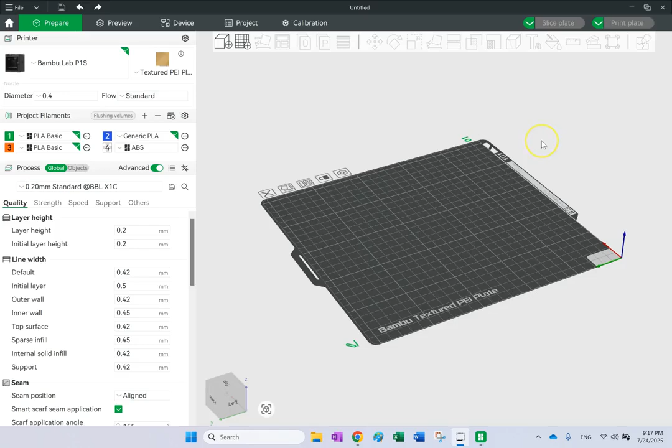Hello everyone. In this video, I'm going to show you some advanced features that are available in Bambu Studio, and probably it's also available in some other printers too. So I'm not claiming that this only belongs to Bambu Studio, but since this is the new printer that I'm working with, while still working with other printers we have, I found it has some interesting features in the slicer software, so I wanted to show them to you.

So the first one that you know is some of the Bambu printers, they have this multi-material head called the AMS. And if your printer has those, then you can basically synchronize here all of the material that you have and all of the colors with that AMS, and then you can print multicolor, right? So that's probably the most interesting thing I would say, but there are lots of more interesting things.

So here you can basically go ahead and remove all of the spools, or you can add them, right? Add as many as you want, and then say what material it is and click here to edit everything about it. Or you can click here on this button and say synchronize it with the AMS.

And as soon as you do that here, the AMS I have has 4 filaments in it, and one of them is orange, one of them is blue, one of them is green, and one of them is a support material. So you see, automatically it synchronizes with that, okay? Because I set it on the hardware, and now here all it needs is one connection, especially because now I'm logged into my account and I have connection remotely to my printer.

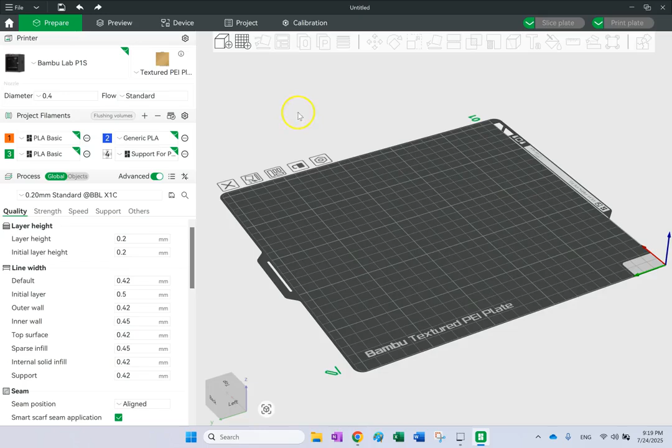So now let me show you the multicolor. So here, if I bring anything, right? So let's say, for instance, I bring this balloon dog, and let's scale it up a little bit. So maybe 10 times bigger. And then maybe just rotate it a little bit. So here, I want to print this part, right?

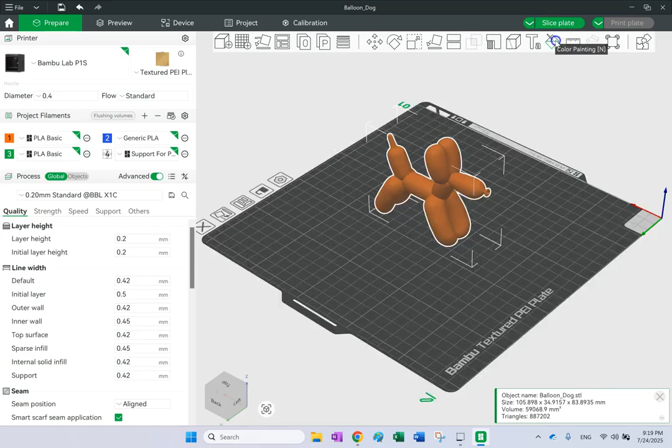So I can pick this and then go here to this option, color painting. And then it gives me different options for painting that. Okay, so I can do gap fill, height range, triangle, sphere, and circle. So these are for like grabbing a marker or some painter and then paint over it, right? So let's say I want some parts to be blue, right? And then I can go ahead and here simply paint all over the part.

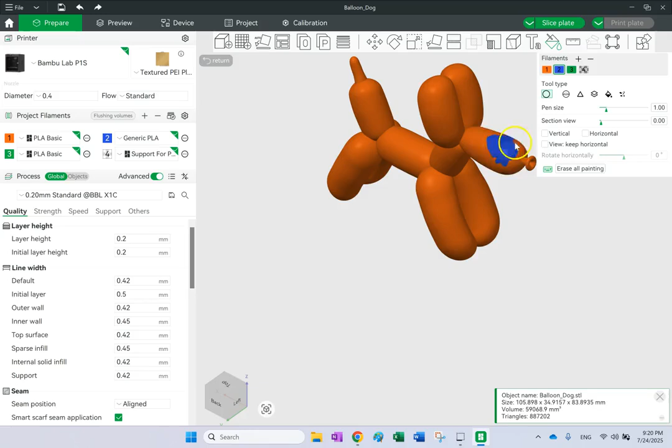Now the problem is you can never get to observe all of the boundaries. So let's say I just want this nose and this head part to be blue, but when I get close to the ears, right, I cannot exactly go perfect, and there is a chance of my hand slipping a little bit, and then I go over the next part. So instead of that, the better way to do it is to use this fill command. This fill command basically goes over one closed area.

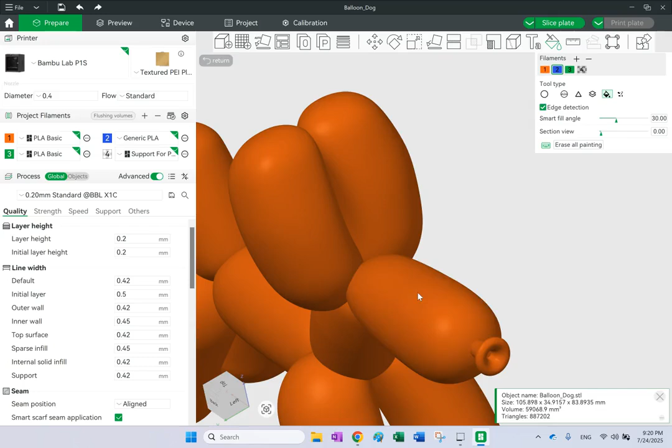So look here, boom, right? Very beautiful. I want this, here we go. I want that inner part, here we go. You see? So this is really great. And I can do similar thing for, let's say, these two, and maybe this one and this one, and the rest of it, maybe I want it orange, okay? So this is a really powerful tool.

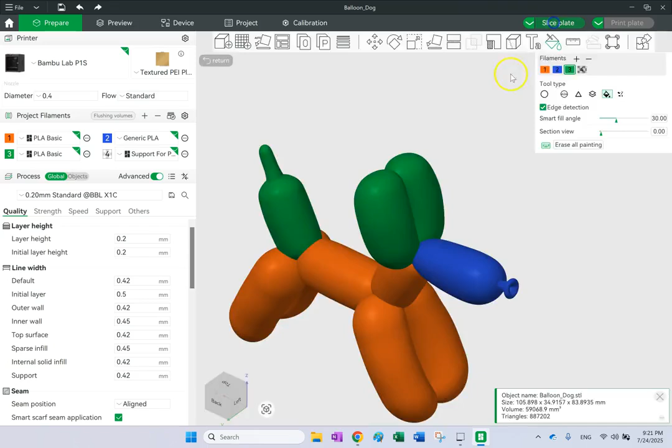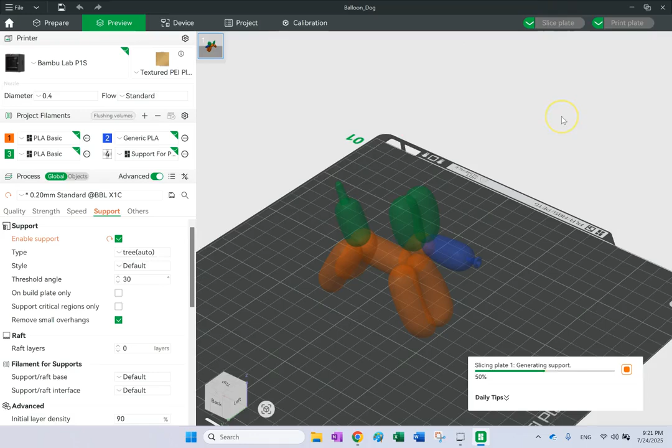And let me tell you that if you do this and you slice it, you're gonna see something that you don't see when it's unicolor. So let me show you here. Now, of course, here I did not put support. That's why it gave me that warning. So it's always good to go under support, and by default, it's not active in Bambu. So you say, hey, enable support for me, okay? So make sure it doesn't have any dangling parts, because those are too long for a bridge.

There we go. And typically the default support in it is the tree shape, which we can change, and I'll show you. But the thing that you see is this guy here. This is basically the purging tower. And you need that when you want to constantly change color, because here, look, you go from one color to the next to the next. So you clearly need to have a purging tower so that it can purge the remaining of the previous color and it can switch to the new color, okay?

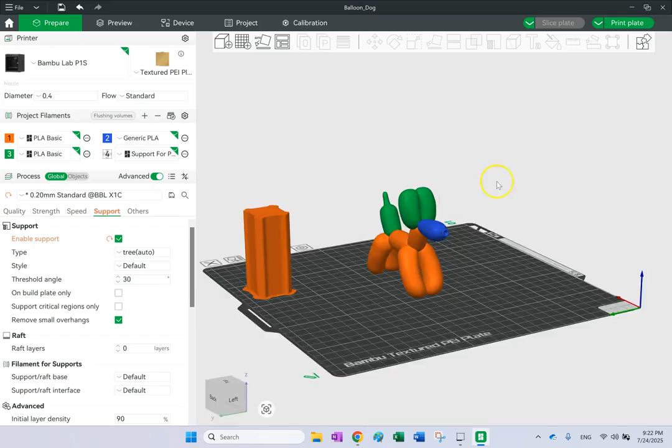But if I go back here to this guy, and let's see if I can clean it up. There we go. And now let me slice it again.

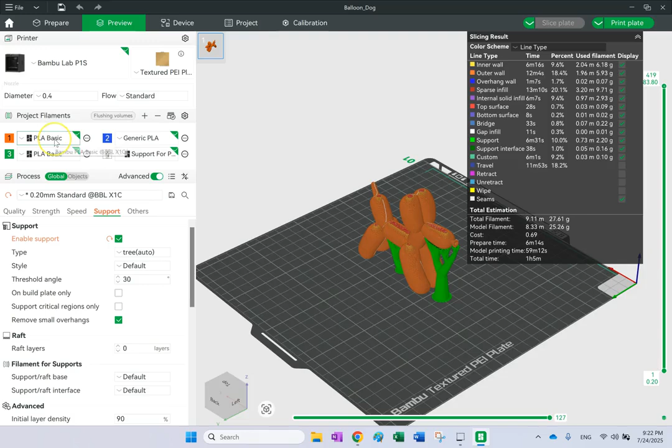There we go. You see? No purging tower, because it's all single color orange in this case, I assume. That is my first spool. And so that really helps save a lot of material. So unless you really want to do it multicolor, then don't go for it, because you are wasting a lot of material in that purge tower, right? So this is about printing it multicolor.

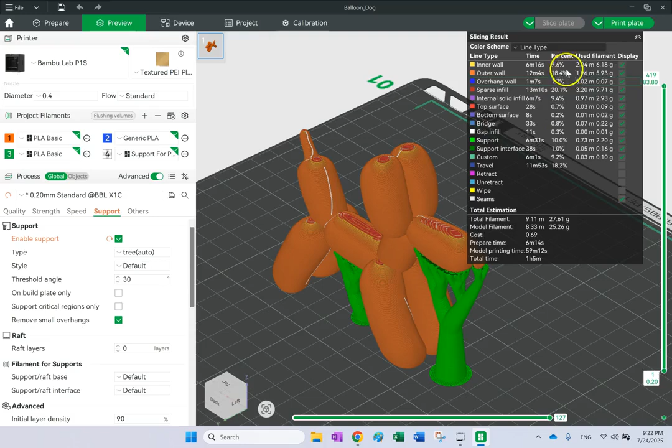Now, let me show you one other thing before we move on any further. So if I go to device here, right? And then if I click on this button here, look, here it has some AMS settings. So that is another thing that is very important. These two by default are not active, but I recommend you do it. So one of them makes sure that if you run out of one filament, it automatically starts using the other filament and doesn't stop.

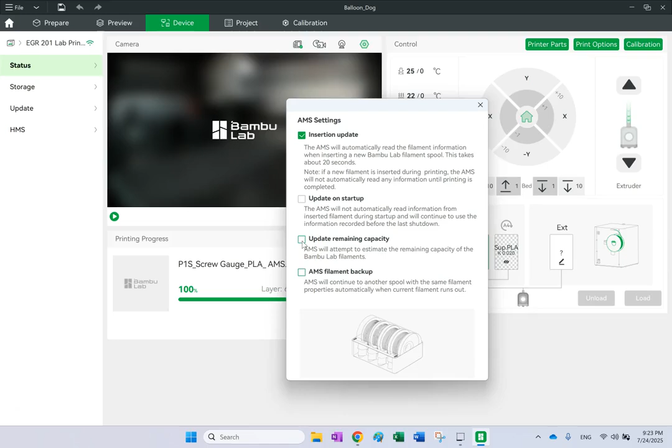Now, this is if you don't care about the color, or if they're all the same color, right? So you can have 4 spools of the same color. So if you have a big print and mid print you lose all of the filament or half of it or something, it can continue. So this is a good thing, or it could be a bad thing depending on, again, whether you care about color or not. The other one is really good. It estimates how much of the material is left, and it can give you a warning. Okay, so I typically turn those two on unless, again, I really want to know about color.

And of course, you always have remote access to your printer. So you see here, right now, it is showing me basically the system, and you can clearly see that the print is done and it was successful and everything. And again, it is showing you here the remaining material that I have. Okay, and you know, a Bambu printer also has room for one external spool. You can also do that one as well, and you can do all sorts of controls here.

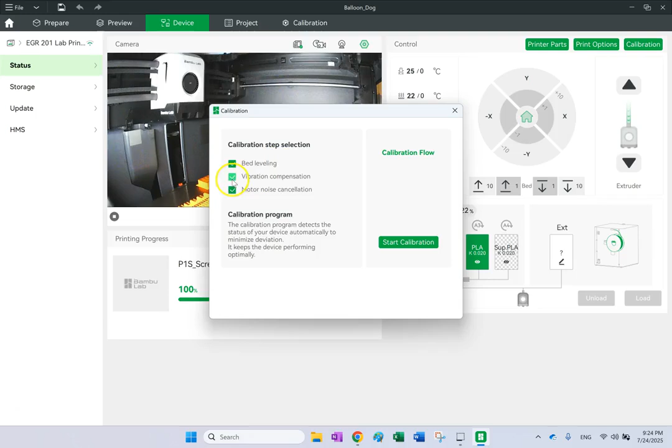Another interesting thing it has is under calibration. Not only does it do the automatic bed leveling, it can also do some vibration compensation, which is really good, okay? So if the foundation is not very hard, or if the speed, which is here, if you put it on high speed, then you can have some vibration, so it tries to compensate as much as possible.

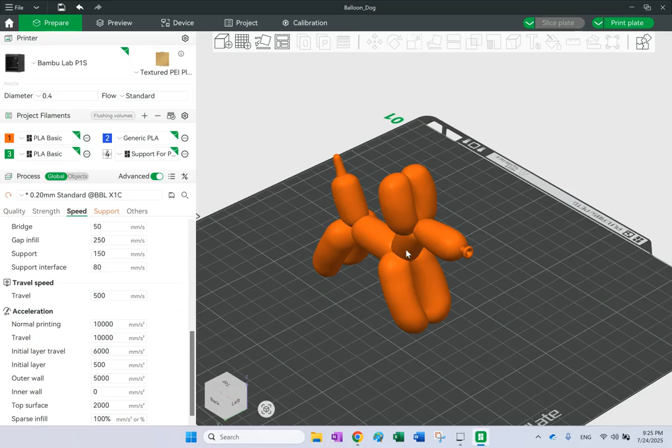And you know, one of the big advantages of Bambu is the high speed of the printing, okay? So it has 500 mm per second, but it can go higher than that, a lot higher than that. So Bambu is one of the first printers that could really print very fast. So these are two of the items. Now let's go to the next one.

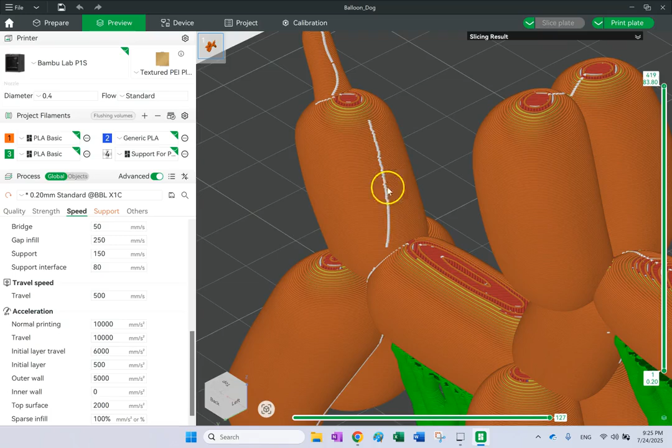So the next one is about seam. So let's talk about seam. You might have seen it here and there, but I just want to explain the seam for you. So what is seam? So look here. You can see this kind of white track here. What is this? These are where each layer starts or ends, and the next layer starts. This is where your extruder stops and then goes to the next layer, goes around, comes back, goes around, comes back.

And typically this seam in physical prints is going to cause some physical gap or basically a small extrusion out of the part. If it's extrusion out of the part, you can probably just cut it out with a knife or a sharp tool. But if it's a gap in the part, that is not going to be pleasant, right?

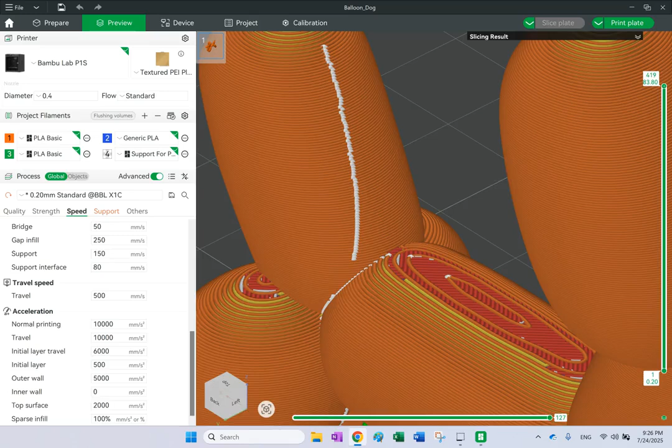So let me show you a seam in a 3D print, so you physically see that. I don't want to grab one here right now, but let me just show you here. So this is one, right? You can see here, that is the line, okay? And this is where each layer finished and the next layer started. Sometimes it might look like a gap here. Typically it's not, but sometimes it might be like a gap, okay? So this is a seam.

Now, what would you do about the seam? Because you have to stop and go to the next layer, there is no way around it. One of the things people do is they try to hide it somewhere where there is an edge by itself, or they try to hide it inside or underneath or somewhere that you don't see well.

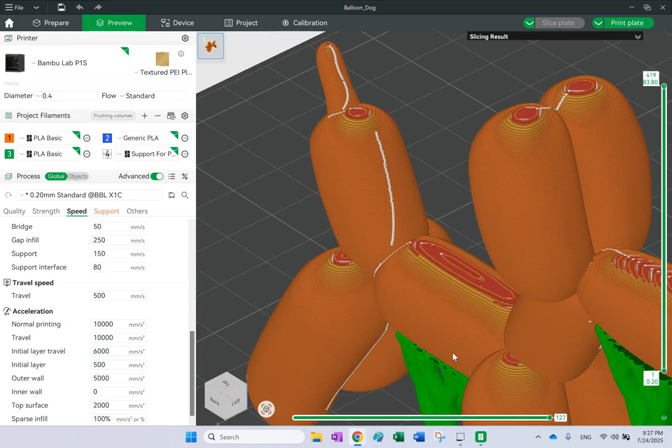So they try to keep it out of the view as much as possible, okay? So that is one way to get rid of it. And here in the software, that part is called seam painting. So if I go back, look here, that's this command here, seam painting, right?

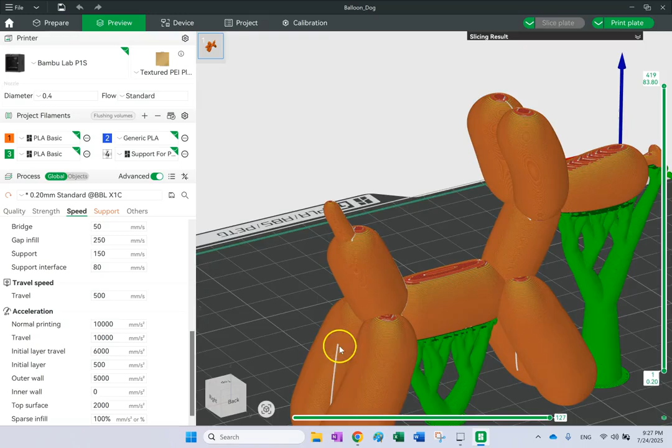So you just saw what my seam was here, right? So the seam here is on this side, but maybe I want to go and put it here somewhere a little bit interior that you don't see, as opposed to right up there. So here I can go and say, hey, I want to do a seam painting. And when it comes to that region, let me, for instance, put it maybe down here. So anything in that region, if possible, put it there for me, right?

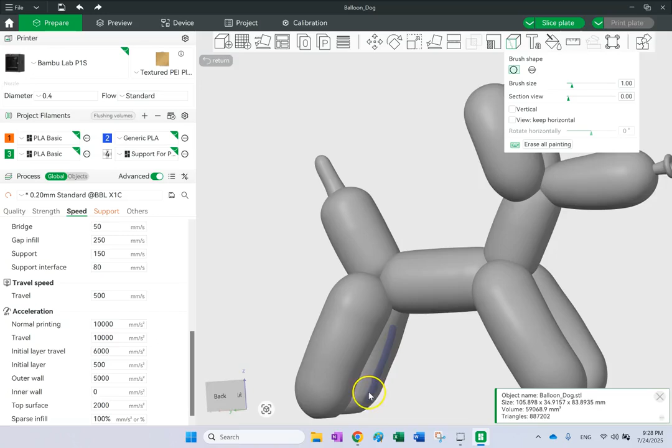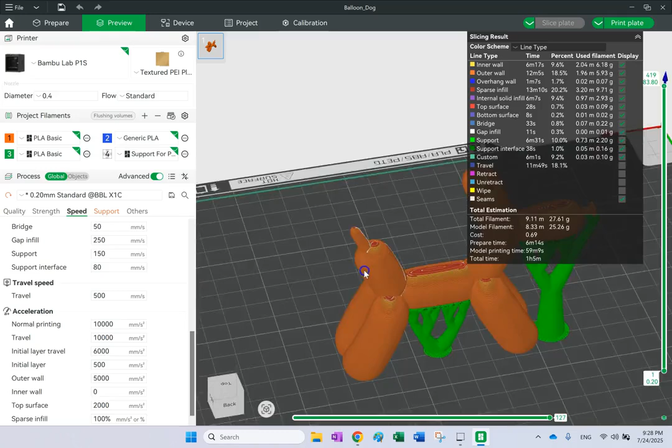So let's do it. There we go. You see, it was here. Now look at it. Now on this leg, it moved it down here for me. Okay, so you can move the seams around and that will update the G-code. So it's a good idea to move the seams as much as possible out of the exterior part of the object and move it inside, or the parts that you don't see. That's one thing you can do for seaming.

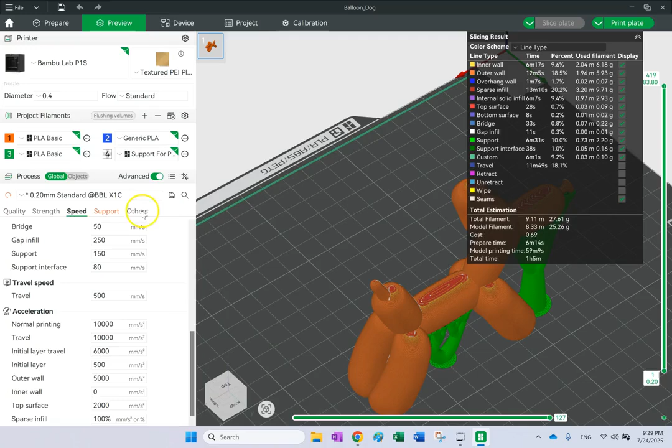The other thing that I want to talk about, and this is really more interesting to me, is what we call the scarf. So using the scarf to basically not eliminate but minimize the appearance of the seam. So what is that one? So here, if we go and talk about quality, look, if we go down, let me show you. There we go. You see, seam position aligned, which means put them all aligned with each other.

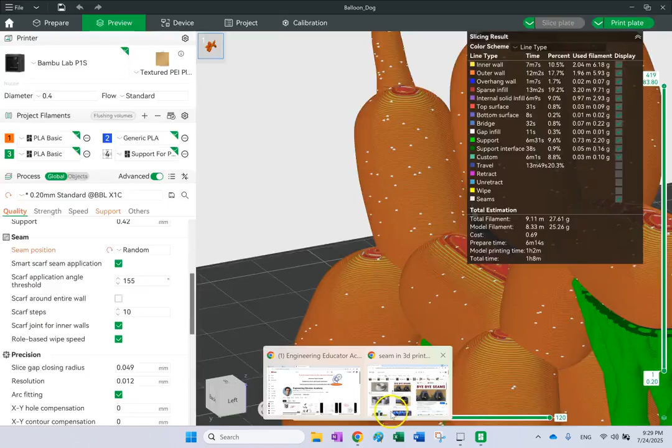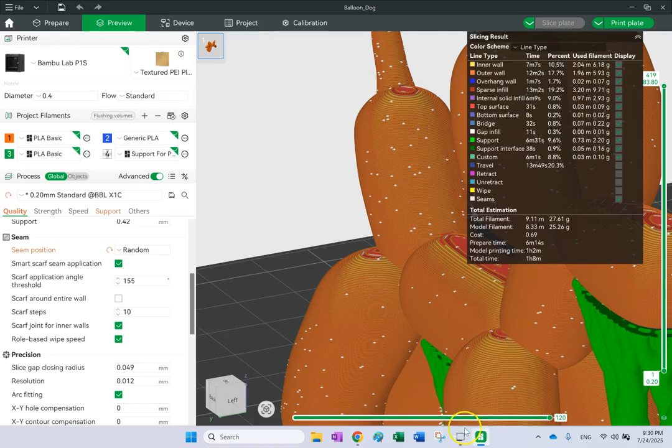Look at that. Do you see it here? Yeah, look at all these points. You see, they're all over the place. So if it was one line like this, I would probably grab something and cut it. But if it's all over the place like that, that's absolutely not a good idea. So I do not recommend you use a random seam, okay? It's always better to be aligned. Aligned is much, much better.

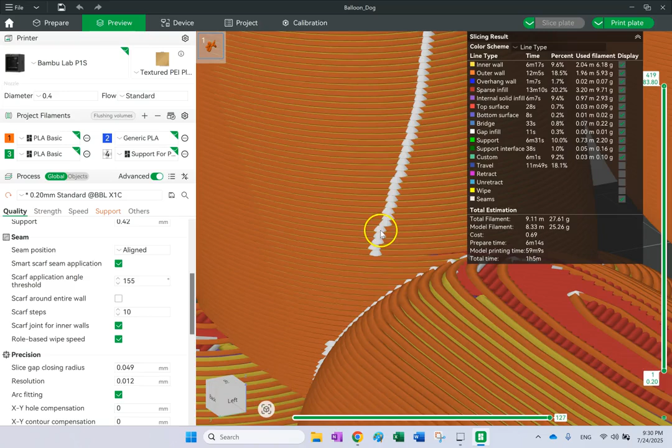But as I said, there is this technique that you can see is called scarf, smart scarf seam application. This is a really interesting thing. So what is this? The way that the scarf is done, instead of this endpoint here, and then the next endpoint right above it, and the next endpoint right above it, and so on, instead of putting them all above each other, it tries to do it kind of diagonally.

What does that mean? It means that instead of making the gap between two parts a straight line, we kind of make it, as I said, diagonal like this, okay? And typically in woodworking, this is the thing that they use, and they use it to reinforce the part and the joints and the connections, right? There are all sorts of different shapes of it. But the good thing about going diagonal when you create a seam is it makes it less visible.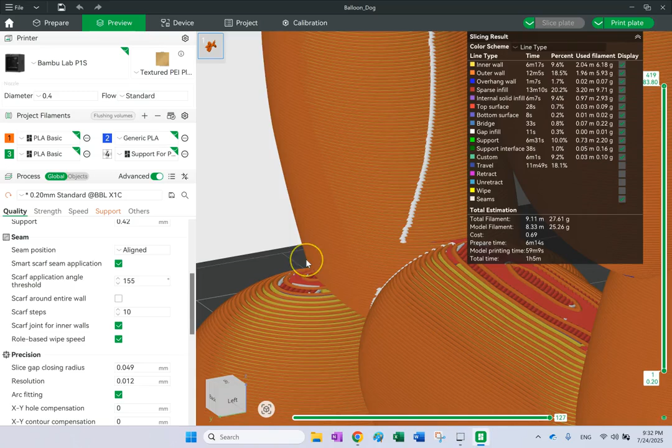So it's kind of a zigzag going from one seam point to the next, and that will eliminate to a good extent the appearance. It's still there, but it's not easy for us to see because of that zigzagging and that diagonal seam pattern. So it is gonna really minimize the appearance of that. So seam painting and scarf are two of my favorite things. Yet an even better one, which I really love, is ironing.

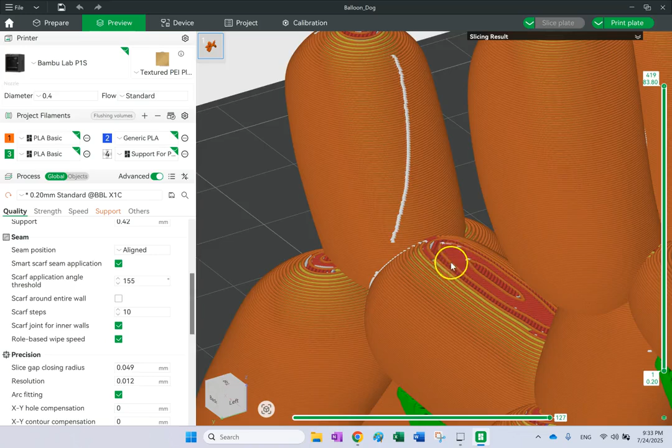So what is ironing? So here, if you look at the top features, when you have top surfaces like this and there is the gentle slope, the problem is you're going to see this kind of bad quality of the surface. You clearly see here that the surface quality is very poor. Now, one of the things you can do is ironing.

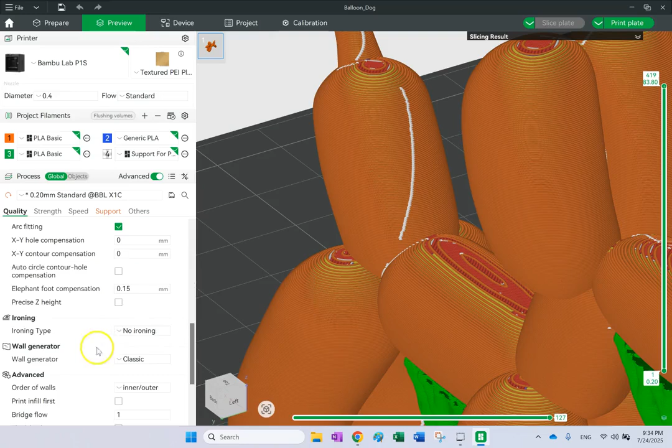What is ironing? So the hot end comes at the top of a top layer, and then it tries to reheat that top layer and kind of spreads the plastic a little bit better. Sometimes it extrudes a little bit on top of that and makes it a lot smoother. So if you want your top layer to look a lot better, my recommendation is you go with the ironing option. So look here, typically the ironing option is not enabled, but if you want, go ahead and say, hey, I want you to iron the top surfaces for me, and look here.

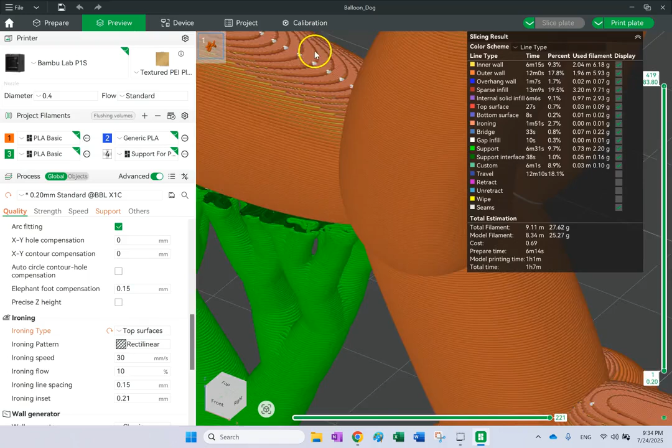Now look, so it kind of, you see, it kind of fills it for you a little bit and adds a little bit extra extrusion on it. So now if you look at these, to me, they are far better looking than what you had. And you can see that over here too.

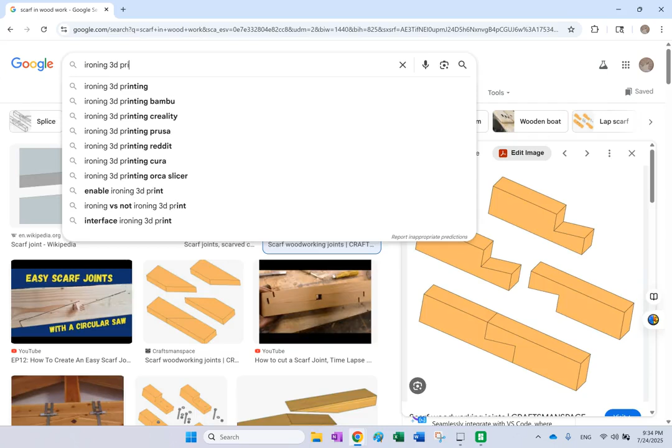If I show you ironing in 3D print, you can see the difference. Look at these two. Right? You clearly can see that. This is a regular one, and this is with ironing on the top of that, and you can see that the surface is much, much smoother.

So if you want to get better qualities, now this might be an exaggeration, but this is relatively better, and as I said, this is a really good one. So ironing can clearly make your top surface quality much better. So that's another thing that I suggest you do, is to use the ironing feature in addition to the scarf, which the scarf is automatically checked in Bambu, but ironing is not.

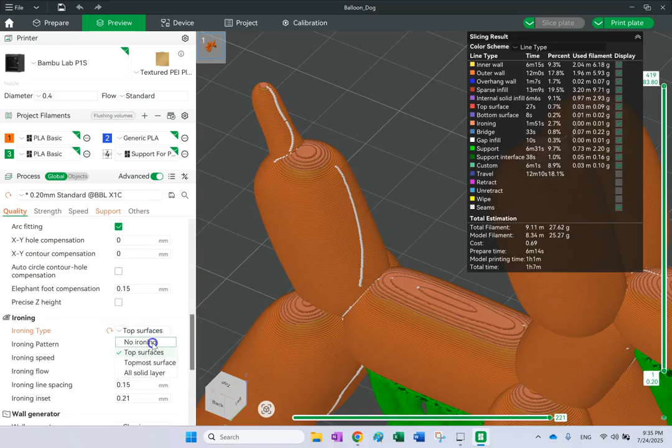Okay, now one thing that you can do, which is kind of exactly the opposite of ironing, is called fuzzy skin. Fuzzy skin basically ruins the nice surface and makes it fuzzy, as the name says. And it should be, I guess, under others, right? Let's see. It was under others. Yeah. You see fuzzy skin. So right now it tries to make the surface nice. But if you say, I want fuzzy on the contour, maybe, look what happens to the surface.

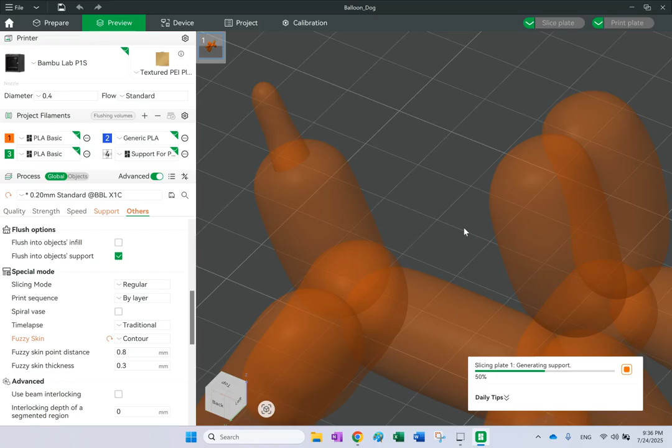So basically it makes the surface a little bit rough. And for some prints, it might be aesthetic, but for some others, clearly not. I mean, look, this is what you get. Okay, so it doesn't perfectly follow the contour, has a little bit of ups and downs, and you get something like this. Again, for some people, if they want to make something artistic, they might think this is really a cool thing to make it like this.

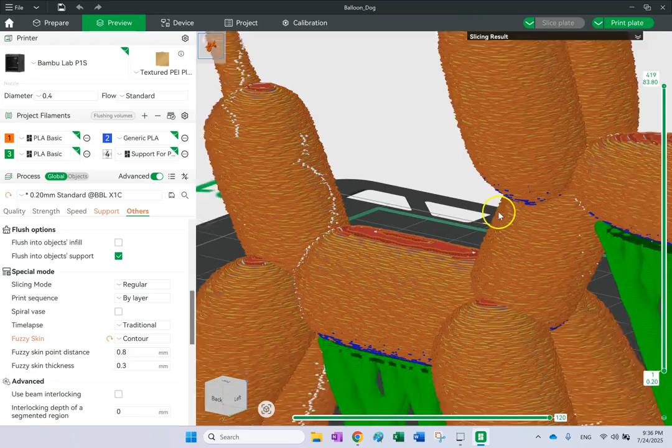But I personally prefer straight lines and following the contour exactly. But this is another thing that might make it interesting or not interesting, depending on whether you want to add artificial texture to it or not. Then you can use this fuzzy skin.

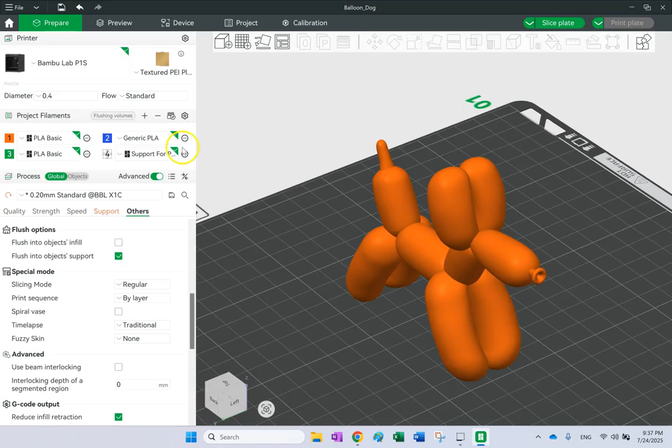Okay, two other things that I really love about it is, if we go here, one of them is this guy, variable layer height. So typically when you print in the quality part right here, you pick a layer height. And it stays at that number for the rest of the print. But if you want, you can make it variable.

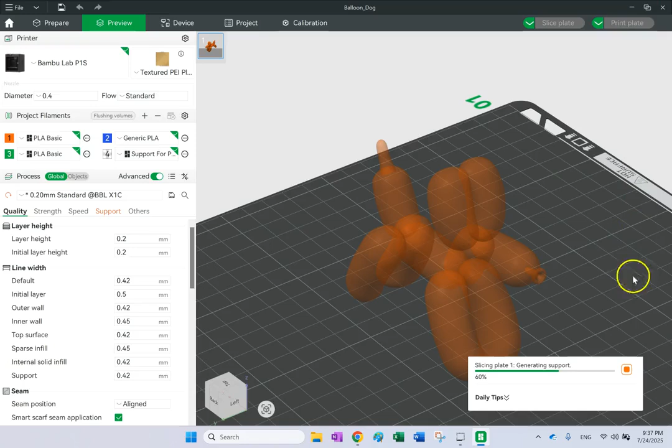So right now, if you look at the layers, let me slice it again. If you look at the right-hand side, which shows the layers, and you can basically move between the layers by that slider, you can see that, look, the layers are all the same height, correct? So look here, when I go through the layers, you see they are all the same height. But if you want, you can go here and say, well, no, I want you to make it adaptive. And what does adaptive do?

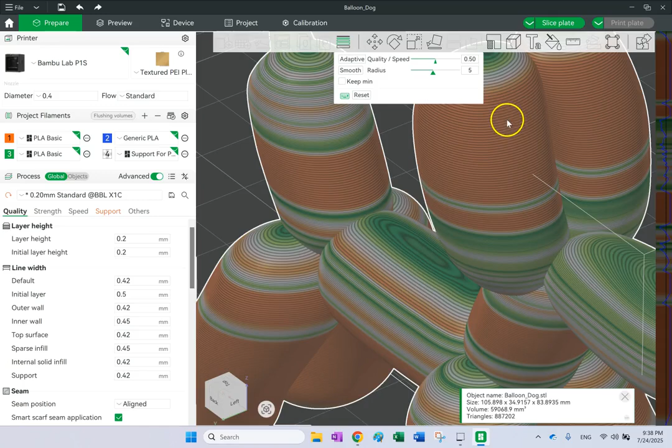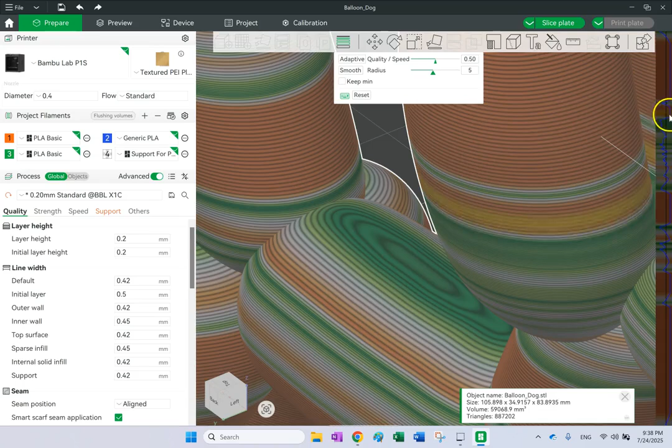So now you see some layers are much thinner, some layers are rather thicker. So it depends on the curvature of the part and how fast the curvature is moving. You can basically make it adaptive. So now look at this kind of curve that you see on the right side, look, it shows you the layer height. So here is 0.1, 0.28, and then here 0.28. You see, all the way 0.28. But here in this region, you're down to 0.08.

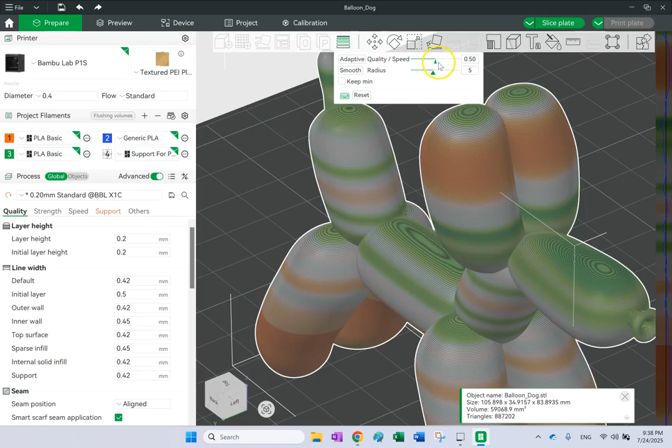Okay, so you can make it adaptive, and or you can make it smooth. So if you look at the smooth now, look, the transition is relatively smooth. You can do that if you want. You can move this slider to the left and right to change the trade-off between quality and speed. So if you want more quality, then you bring it more to this side and make it adaptive. So now it tries to make better quality and not care too much about the speed, still making it adaptive. And you can have some minimum, right? And then if you don't like it, you can reset it. So this is adaptive layer height, but that's not the only one.

Another thing you can do is adaptive line width. This is also very interesting. By the way, adaptive layer height you can do through hardware, by how much your z-axis is moving up and down using your stepper motors. But adaptive line width is your resolution in the X and Y direction, as opposed to this one, which is your Z resolution. For the X and Y resolution here, you see the default is about 0.42, which is almost the same as the nozzle, which is 0.4.

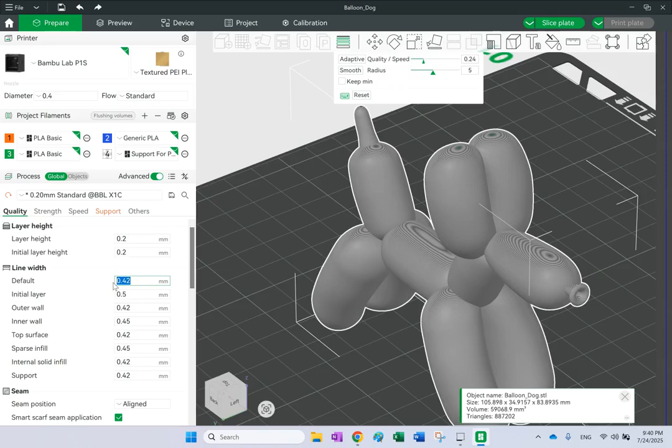But if you change the flow rate and the speed of the motion of the hot end, you can change the thickness of the plastic coming out of the nozzle. Typically, the slower the nozzle moves or the higher the flow rate, you get thicker lines, and the faster the nozzle moves and the smaller the flow rate, you get thinner lines. So if you want, you can change the line width right now.

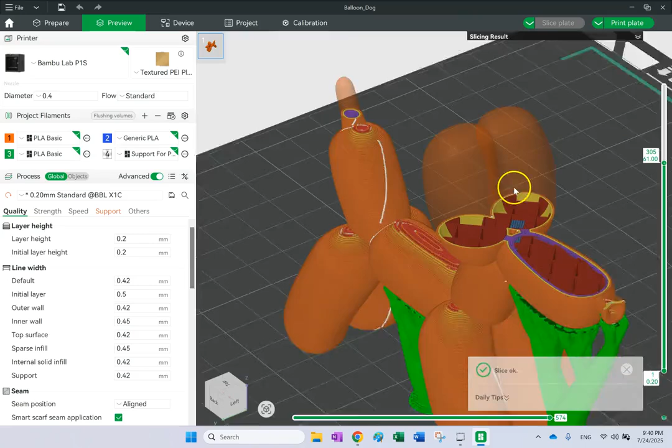So let me show you, take a look. Right now, if I use the bottom slider, you can see the thickness in the X and Y in each layer. Let me move this out of the way. Here it is moving on each layer. Let me move out so you can see better. Okay, that's the thickness of what you can see.

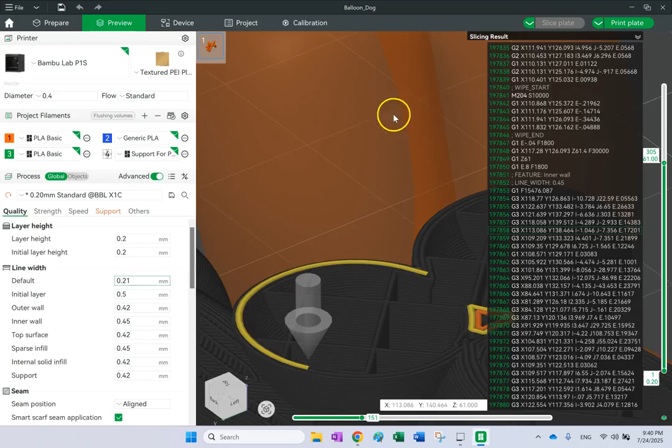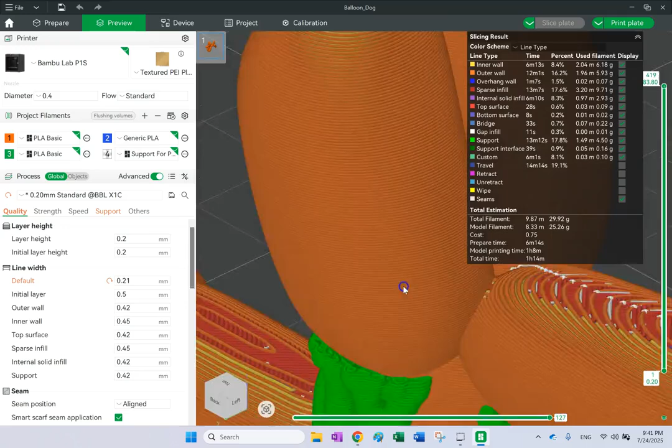But let's say I make it 0.21 or 0.20 or something, and slice it again. Now I'm forcing it to go with thinner lines in the XY resolution. So I can do that as well, and now you have thinner lines. I don't know if you can compare against last time, but your lines are a little bit thinner this time. And again, you can control this as well, which is a great feature.

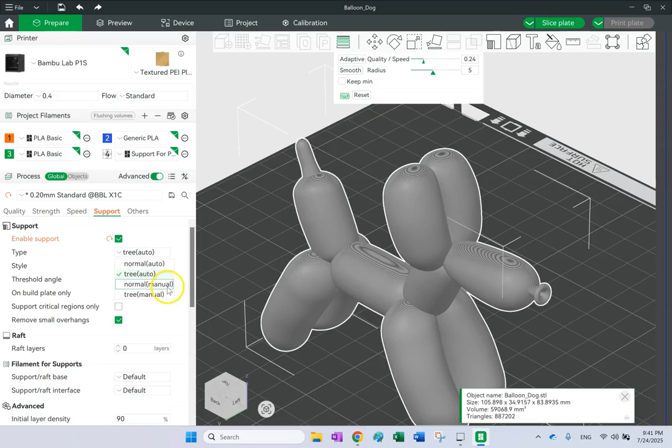By the way, remember I showed you that the support is a tree here? If you want, you can change the shape of the support. You just need to go to the support and you see the type is tree. If you want to do it like other printers typically do, you can do a normal support as well. There we go. You see, typically this uses more material and is harder to separate. Tree is the better kind of support.

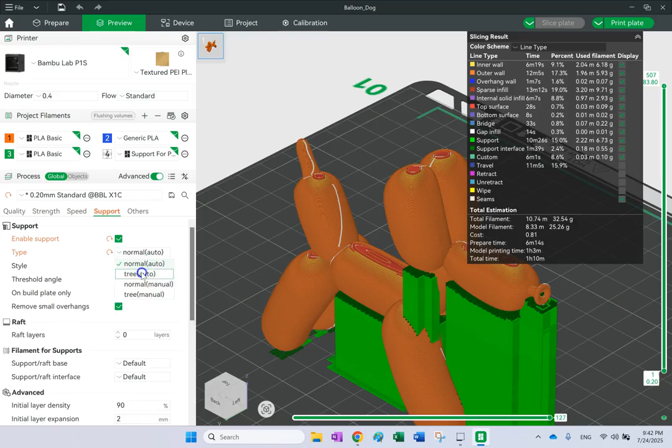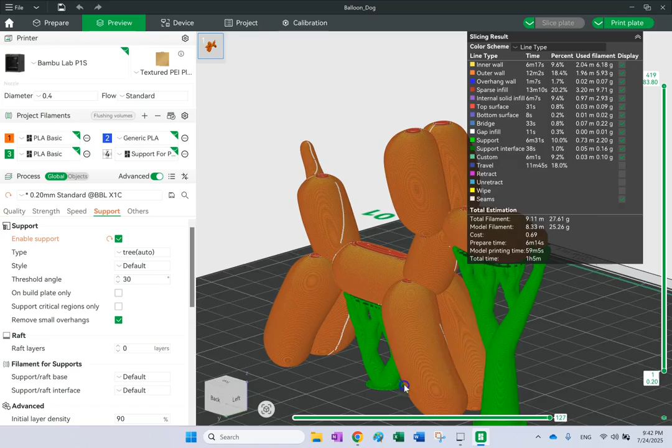It is much easier to separate, and it typically uses a smaller amount of material because it's not going all over the place. At the bottom it starts as a tree, and when it reaches up there, it expands and covers all of the weight, so the weight is supported by this trunk. This is a very smart method of support material. Again, much easier to clean, and it's going to leave a lot fewer scars on the part, as well as using a lot less material.

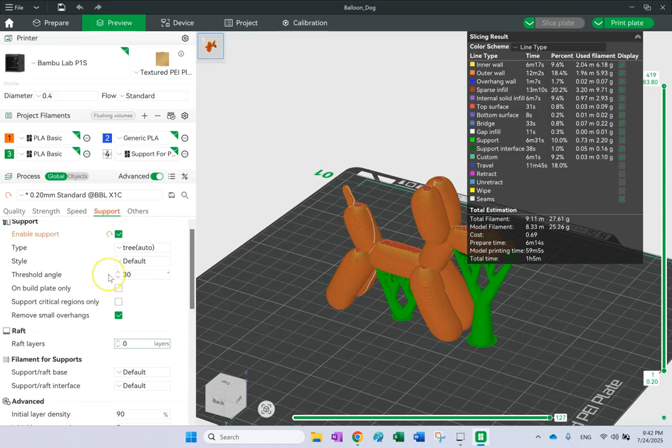And of course you have the settings for the raft here. You have the raft command, so you can do raft. If you want to do skirt, it's also here. So everything is here. There is brim here. And then under strength, you have the infill percentage, the infill pattern and everything here, and the shells or the number of walls.

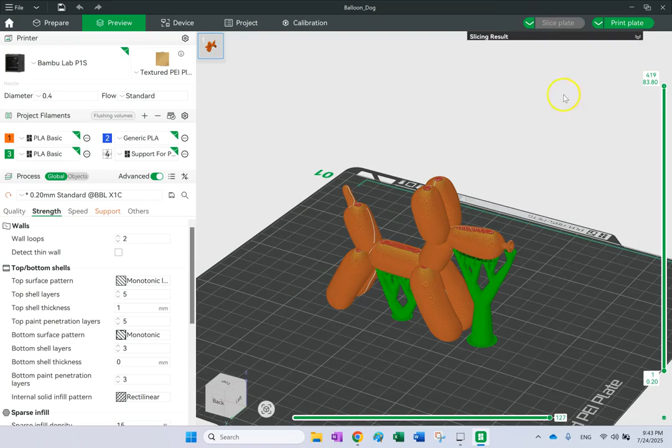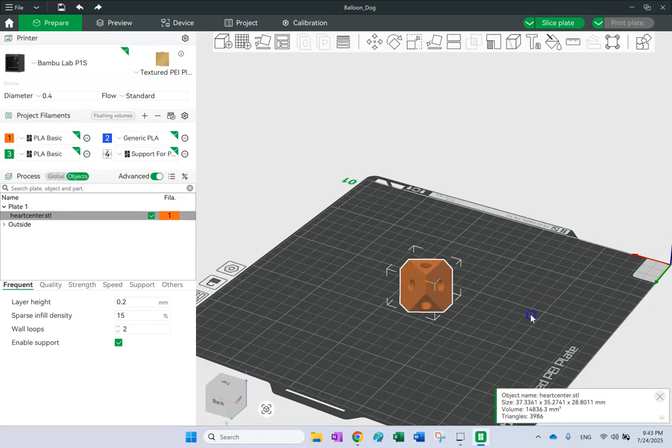So let's move on. The next thing I want to show you is adding some kind of logo or trademark on the part. Let's say I want to go on some surface. For that, I would rather use a different object, which is more flat than this one. So something like this. And let's say I want to put my name or something on this face.

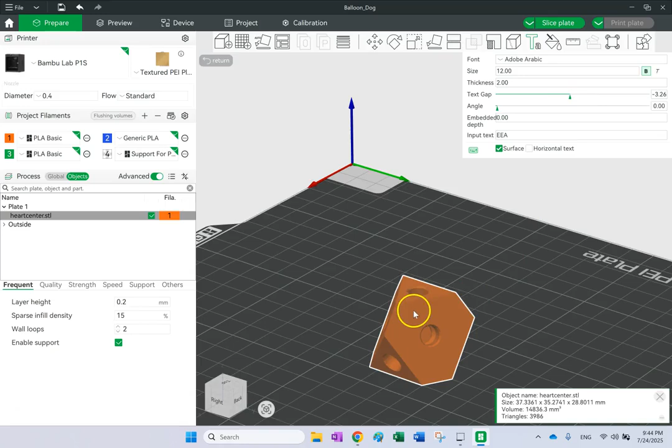So I pick this and then I go to this text tool, and here it allows me to type whatever I want. Let's say I want some font, and I want the font size to be 12 and the thickness maybe 2 mm, and the text: Engineering Educator Academy, EEA. It is good to start at the surface, and I can make some small gaps. If I click here, it should show me a preview of the text.

And you see here, that's the bad place that I clicked. If you don't like it, you can start in another place. So that's where I clicked. But if I had clicked a little bit more to the left, then I would have had that feature more on the left side.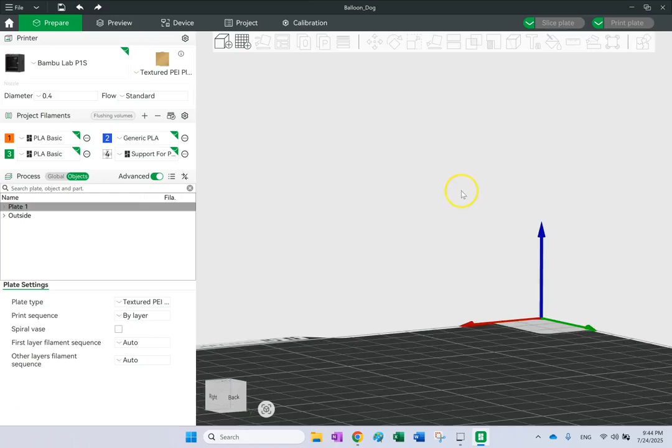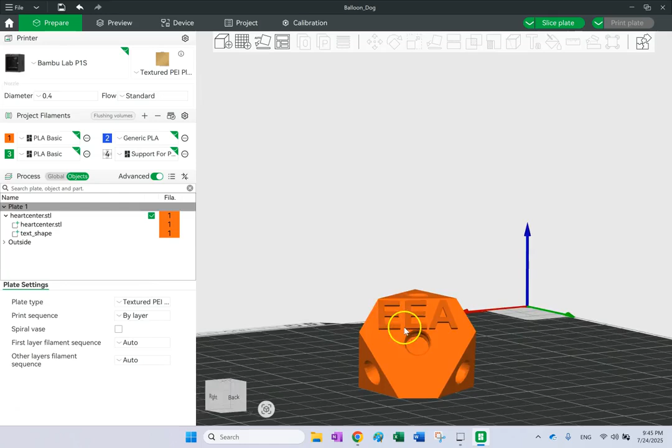So I'm doing it again, and I'm being a little bit patient because I want to show you, right? So again, maybe this is too big. So if you're a little bit patient, it should show you the preview of it, so you exactly know where you're plugging it. So let's say I want it right here, and I click and I OK that, and now look, here I have this emboss on the part, and that is going to be a part of your print.

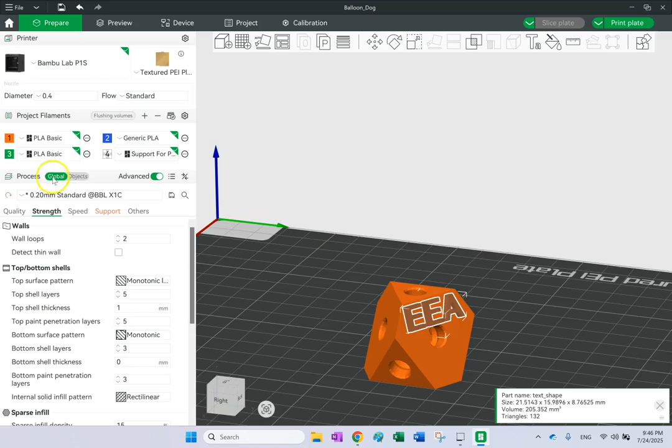So if I slice it, that is going to be a part of my print, as you can see. And so I can add my logo at the very last second. So this is really beautiful. Okay, what else? By the way, you didn't need to do Control Z. You could just go here. You go under Objects instead of Global Setting, and this is the guy. So you can simply delete it if you don't like it.

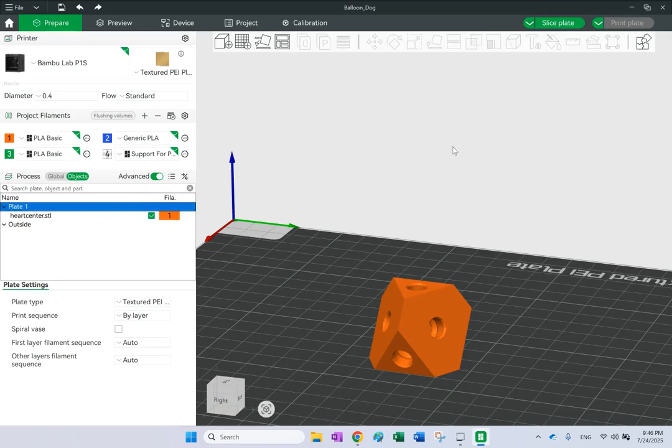By the way, you can also support several plates. So something can go outside the plate, and you can bring it to the other plate, and so on. That's why you see outside here. Now, one of the things you can do is the cut, and I like cut very much. Sometimes you have a part, and either this part is too big, or the surface that you want to put it on is not really flat. I don't think I have a great option, but let's see if I have this part.

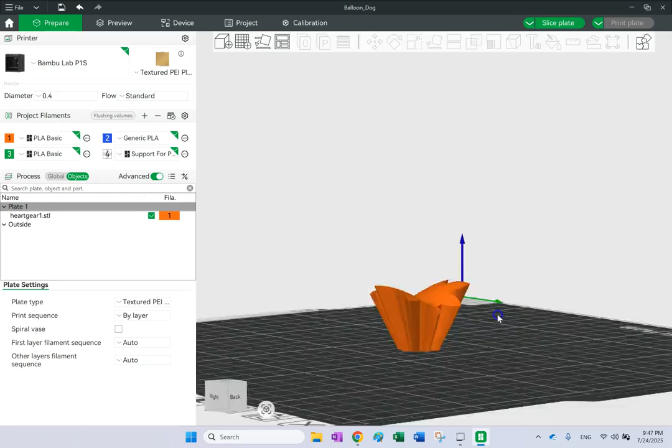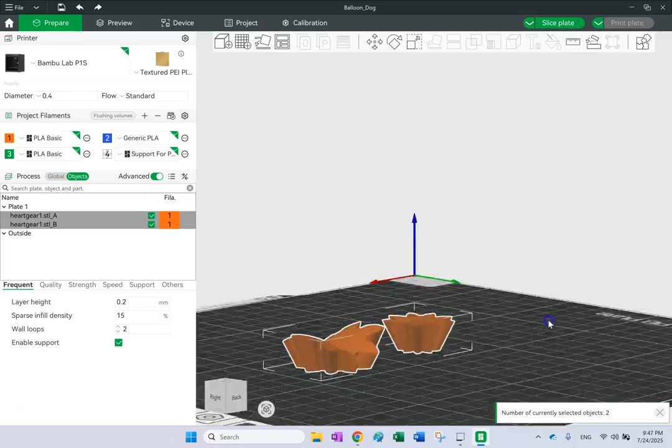So this part is not super bad, but if the bottom of it was also curved, one thing I can do is go here and say I want to cut this guy with this tool. And here I can move my cutting plane wherever I want to cut. You can rotate this plane, you can move it up and down, left and right. Once you're good, perform the cut, and there we go. So now this part is flat and that part is flat.

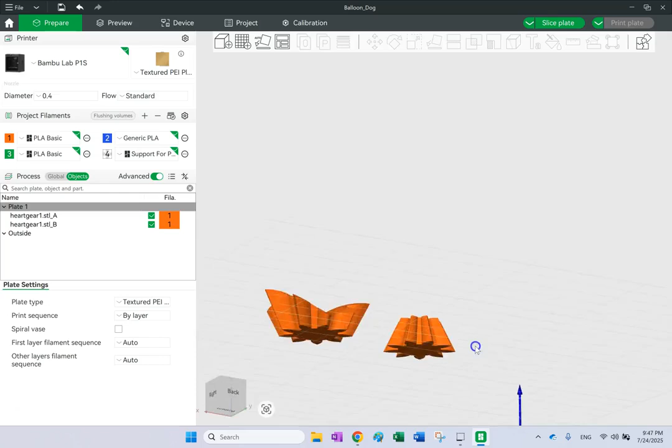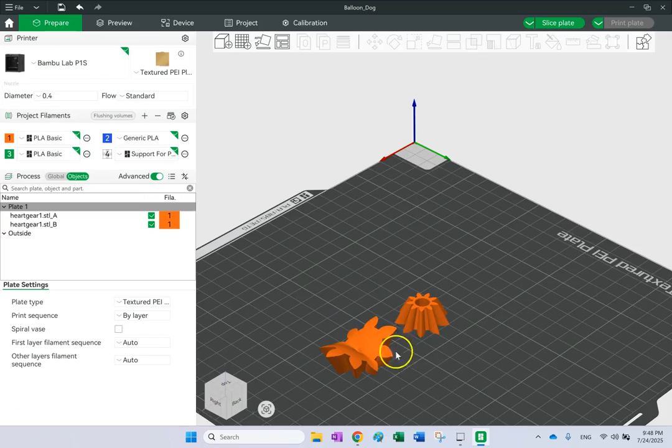So now you can go here and say, for this guy, I want you to lay this surface on the print bed for me. There we go. So now you can have flat surfaces and you can do a lot better. Of course, it's a good idea to have tabs and holes so you can easily glue them together. But if the part's strength is not super important, maybe this is the way to increase the flat areas, and to make a big part that doesn't fit on the print bed in two pieces so it does fit, or you do each part separately.

The last part that I want to show you is the Boolean operation. So let's say you have these two parts and you want to perform intersection, union, subtraction, or anything. And these are two mesh files. So you bring them in, and just by highlighting them, this command here, which is mesh Boolean, is not going to work. It says right click to assemble these objects. So when you highlight them, you right click and say merge. Now they become an assembly, and inside the assembly, you're allowed to perform whatever you want.

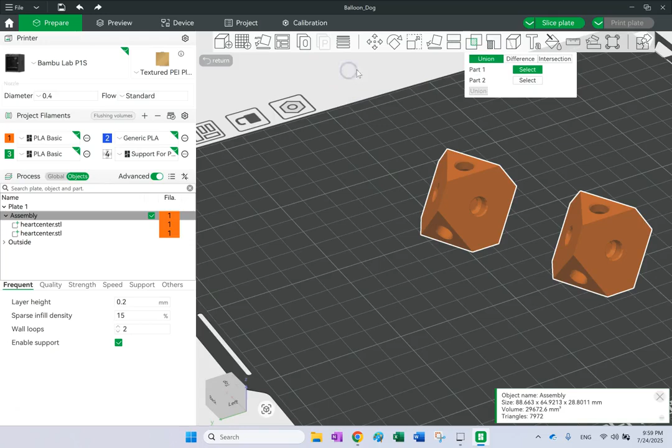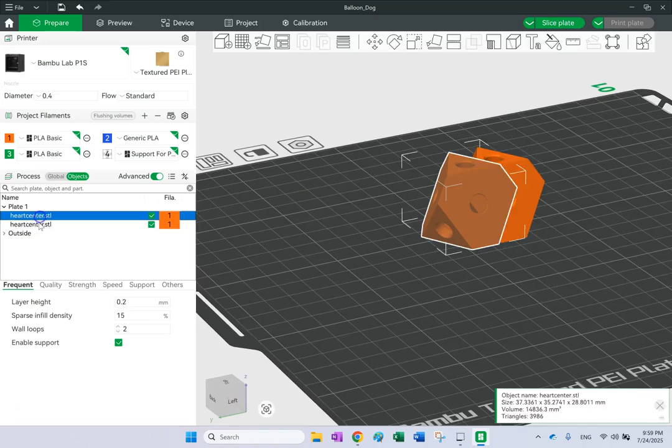But in this case, they have no intersection or anything. So before I do the assembly, maybe it's a good idea to bring them closer so they have something together, something like this. Now that I have these two, I can go ahead and do merging. And now I'm gonna click here and say I want a union of them. So pick this with this and then do union.

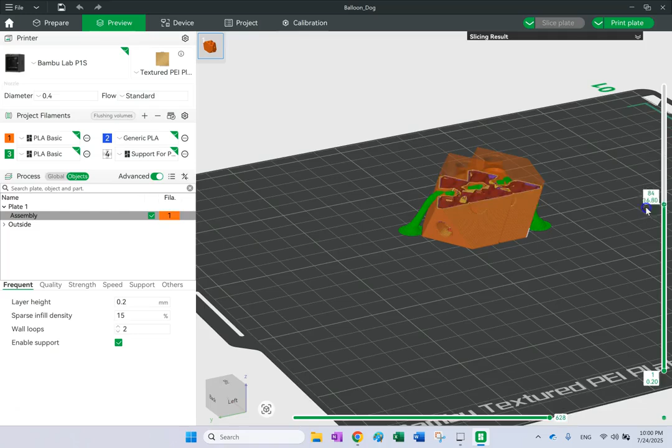And you see now, instead of having two separate objects, you only have one object, which is this assembly. So if you slice it, this is only a single part, not two separate parts. It's a merged part. And you can do the other two operations as well. So these are the major commands that I wanted to show you, which are really interesting. I really loved each one of them. And I wanted to add this video to my 3D printing playlist so you know about the new features of Bambu Lab.